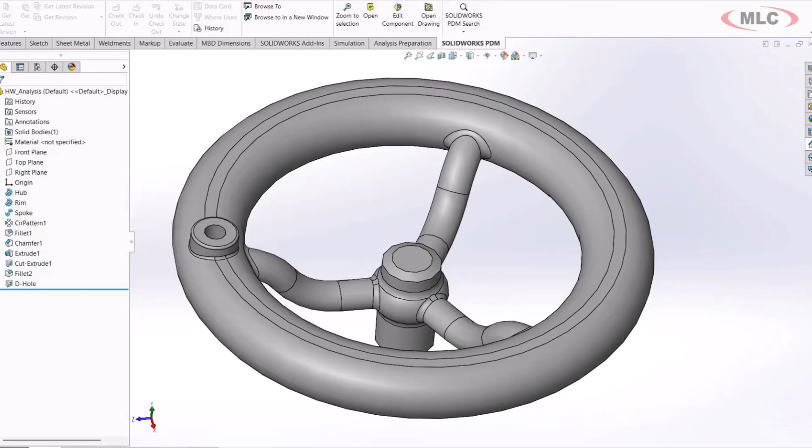So let's take a look and see what SimulationXpress looks like in SOLIDWORKS. We've got this wheel here, let's think of it as the wheel on a submarine door, or maybe a ship door. What we want to do is work through the SimulationXpress tools and see what this looks like. So we'll go to Tools, Xpress Products, SimulationXpress.

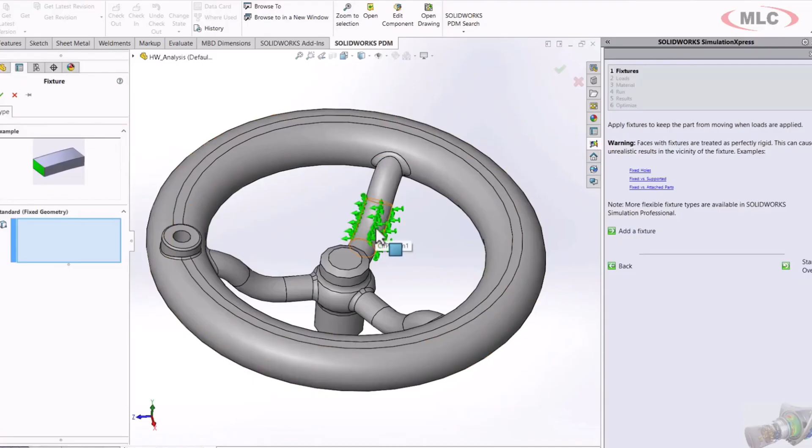Now it's going to start walking me through on this right hand side, so this is what we're going to pay attention to. I've already run one, so I'm going to click Start Over, but this is what it looks like as a brand new simulation. First thing we need is to add a fixture. Now we're pretty limited on the types of fixtures we can apply - we can basically just apply a completely fixed fixture, fixed geometry, and it's not going to be able to move at all. So I'm going to select the inside faces of this threaded hole on the back side, hit my green check mark, and go hit Next.

Now I have two options here on loads: force or pressure. I'm going to add a force. I'm going to select this hole, then I can actually change my direction so that it is normal to, say, my right plane. I want this to be... set my force to be 3,000 pounds. Hit my green check mark.

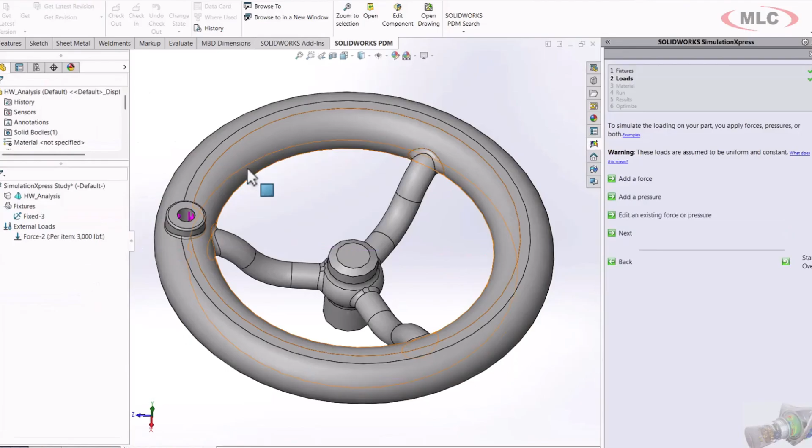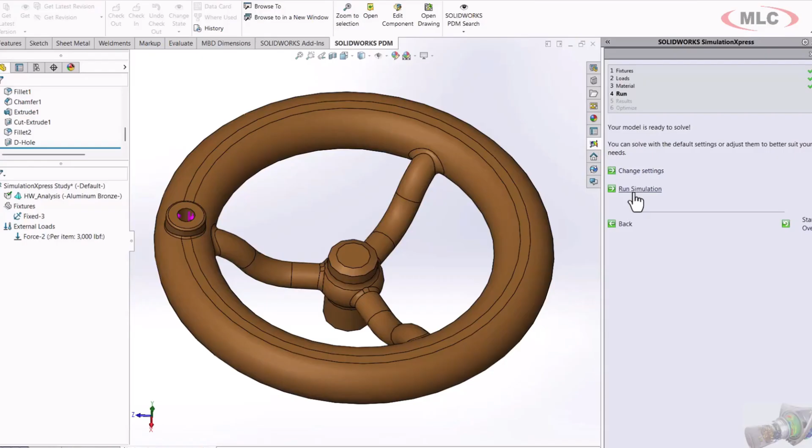I'll hit Next, make sure to specify material. In this instance, we're just going to choose a copper alloy, which is aluminum bronze. At this point I don't have anything else to control - I don't have any mesh control, nothing else. I just have fixtures, forces, material. When I hit Run Simulation, it's automatically going to mesh this whole thing for me.

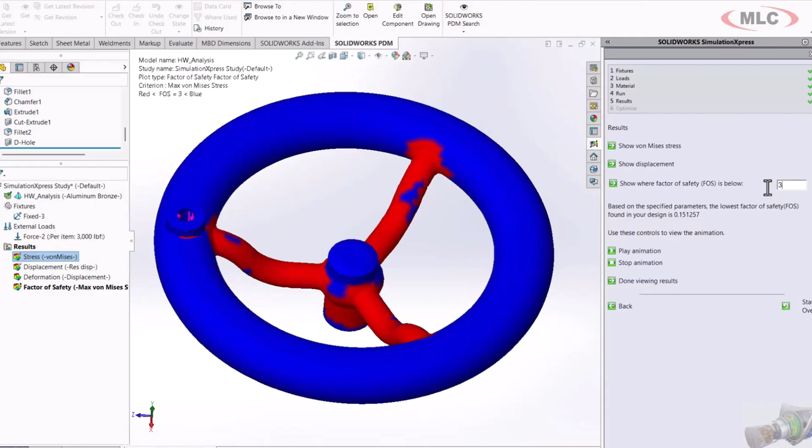It'll crunch through and show me my results. It's going to ask me, hey, does this deform as I expected? It looks like it does. And here's where I actually get a few options - I get my results: stress, displacement, deformation, and factor of safety. So real quick gut check, say this needs to be at least a safety factor of 3. I can clearly see that this is not a safety factor of 3.

So I could just go back in here to my model, edit my material, maybe make these spokes a little thicker, and then rerun my study and validate everything I've been doing. That way I'm at least on the right path to start off this project.